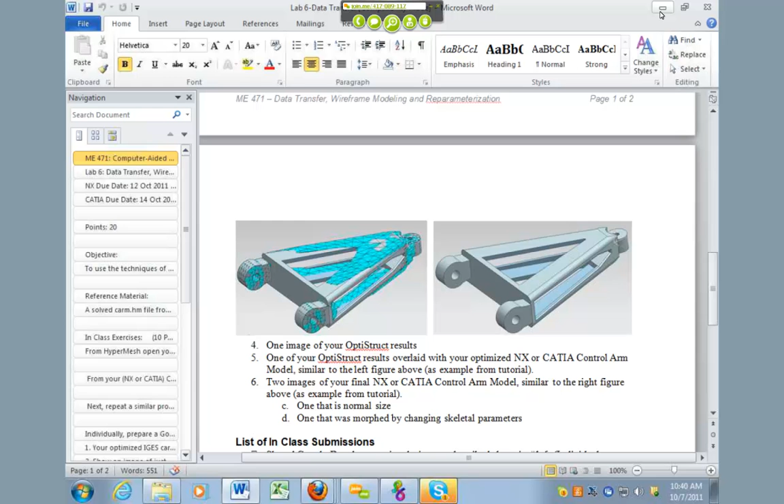So that's all we expect for the in-class exercise. When you guys are recreating these parts for your actual homework, you'll need to make sure that all of these sketches you create are relative to your skeleton. You'll need to make sure they're parameterized and linked up to your skeleton, so that when you hit in the IGES file, you can morph the recreated part and still have it fit.

There's a couple of images in here that I wanted to show you guys. The pictures of the... Okay, yeah. And with that, it's more important to spend more time on your part and not the tutorial part. Don't spend tons and tons of time making the tutorial part look really good. I can't make one, but don't worry about it too much.

I got a question. For this homework, do we all have to do the control arm individually? Yes. Because that just seems like a waste of time to me, since some people are doing one they're actually going to use, but we're not doing a part we're actually use for the final project. Yes, that makes sense, but the purpose of this lab is to still not just do the tutorial, but to do one. And then you could use one of those in the project, and still do another. Just because the people doing suspension are already doing this. I said it does make sense, but however it is this assignment.

Yeah, so let's do it. This will be your first screenshot. You'll have the IGES component with the part. That'll be your in-class assignment.

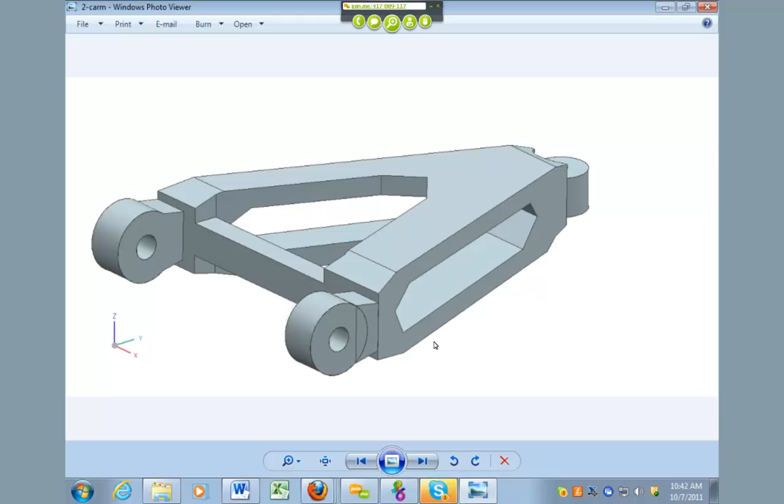So you'll have an IGES with the car part, then a screenshot of just the optimized part without the IGES. Then you're going to take an actual part from your car, something that's already in there, and you will run an OptiStruct analysis.

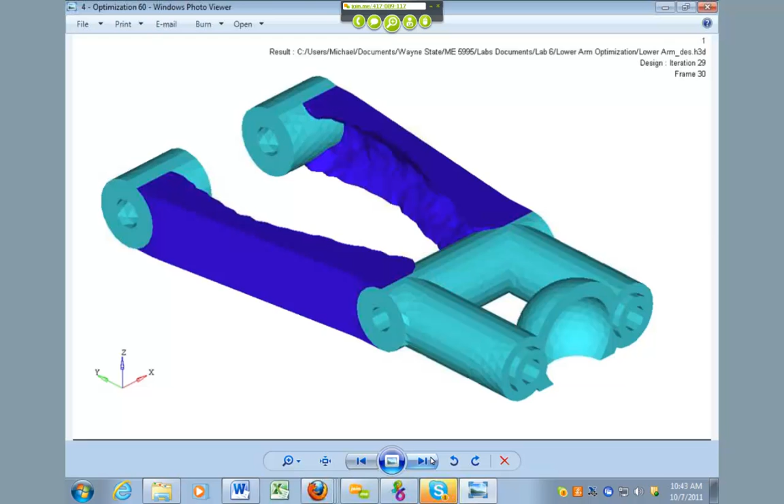First, you'll show that it's parametric, so you'll show that you can move it. You'll come into OptiStruct and run an analysis, and you'll have a screenshot of the eaten away geometry. You'll then bring that back into Catia, recreate the part, and show the part with the IGES geometry in it. Then you'll have just the regular part without the IGES, and show that the new part can be parametrically changed.

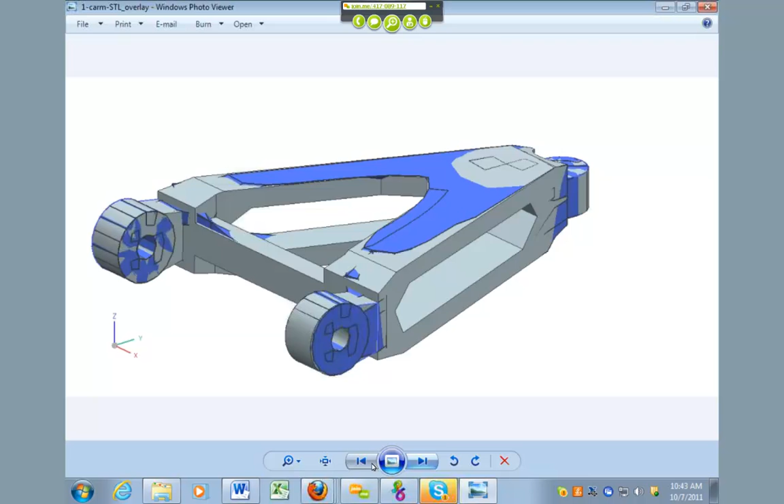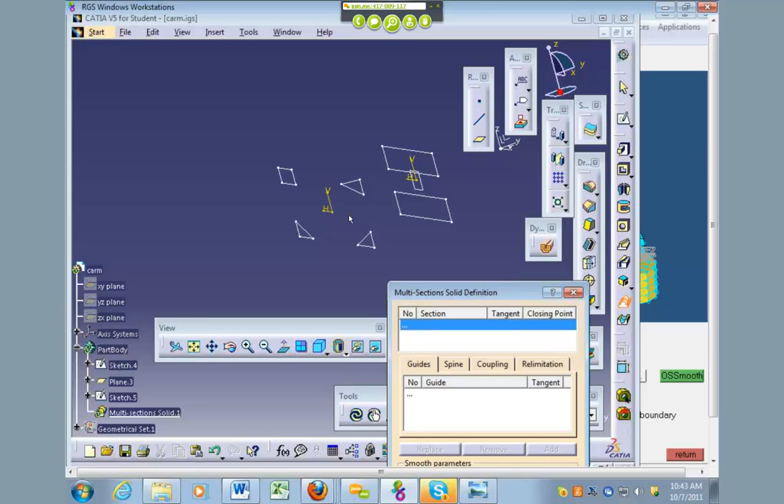So that's kind of what we expect. When you're inside Catia and you've got this thing imported and you've drawn all your geometry, you'll need to make sure that new geometry is constrained to your skeleton or using the parameters from your skeleton, so it'll update properly.

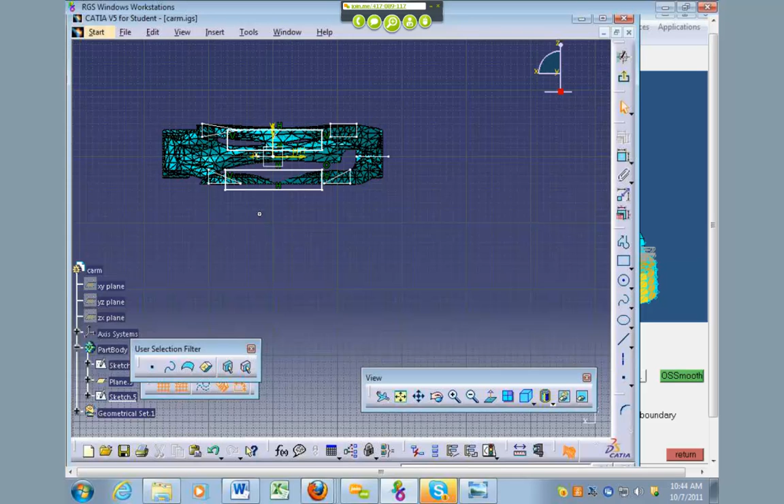There's a whole bunch of different ways you guys can do this part. One way is to just take multiple cross sections by creating new planes, and at each one of those planes just use that clip tool I showed you guys. So if we come into this sketch right here and clip it, you can see exactly what's on that plane, and you can make a nice square or triangle or some nice rounded edges.

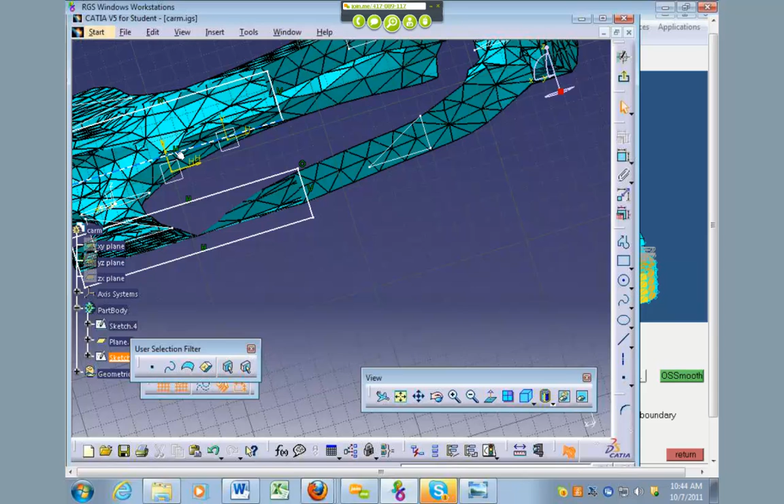You don't have to actually go from point to point to point to point. That's just something that's not manufacturable. So we want a manufactured part, so this has got to be something nice.

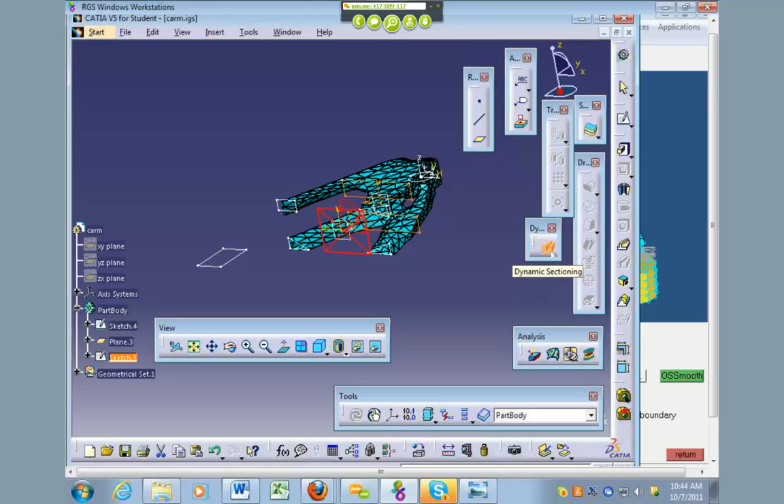And then you can turn on your dynamic sectioning tool if you need to, and you can clip things at different planes as well, so you can clip things at that plane if you need to get a better look and see how well that fits there. This dynamic sectioning tool works outside of the sketcher. On the inside of the sketcher, you just do clip plane, and it'll clip it wherever you need to.

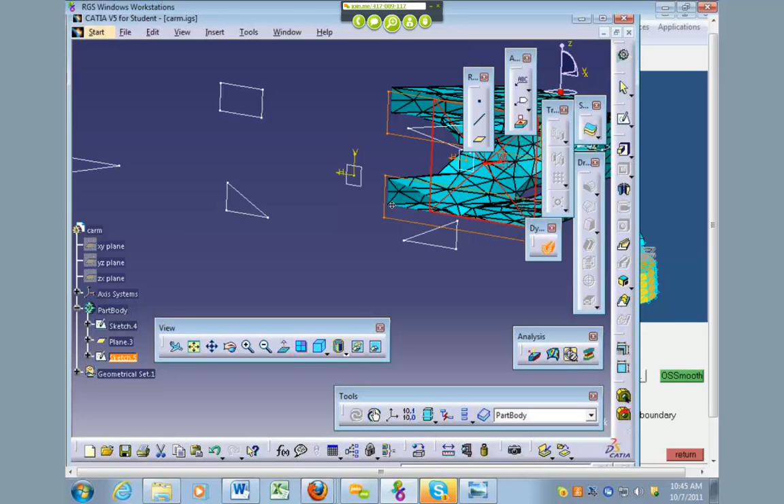So you guys can use all of those tools to get a good idea of what the cross section looks like. My suggestion is to have multiple cross sections at different points where the geometry changes. Right here it's all solid, just one solid body, but if you come out here it breaks off into 2 legs. So you might want to have a couple cross sections there to create a multi-section solid that you can loft through, which would be very helpful.

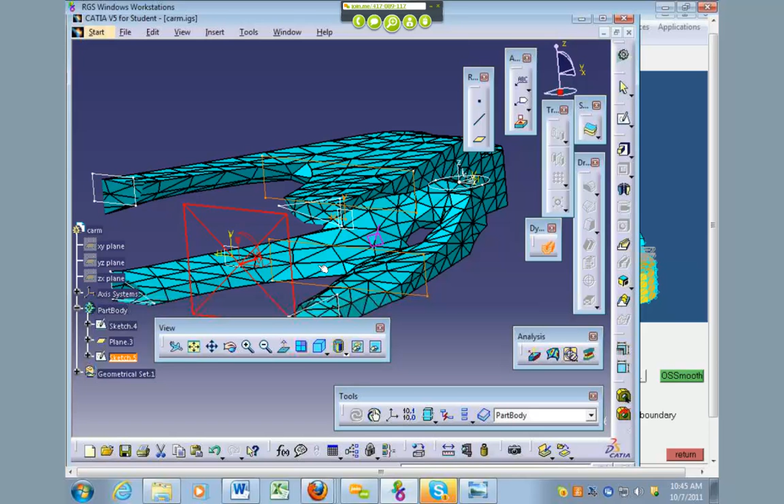Anyway, so you can recreate the part. If you're not keen on using these multi-section solids, you can just do a regular sketch. Let me grab that plane and we'll do a sketch on that.

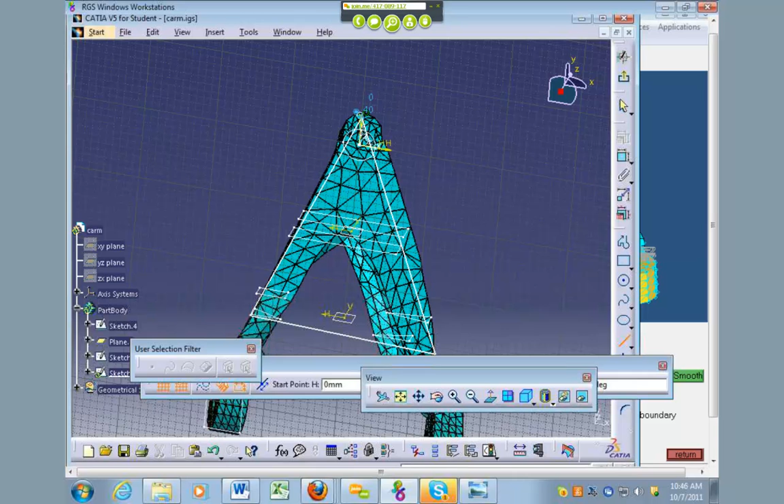You can just do something that looks like this, even if you wanted to. Come down here, come over here, place that, come up here, place that. So there's that, and then you can pad it up.

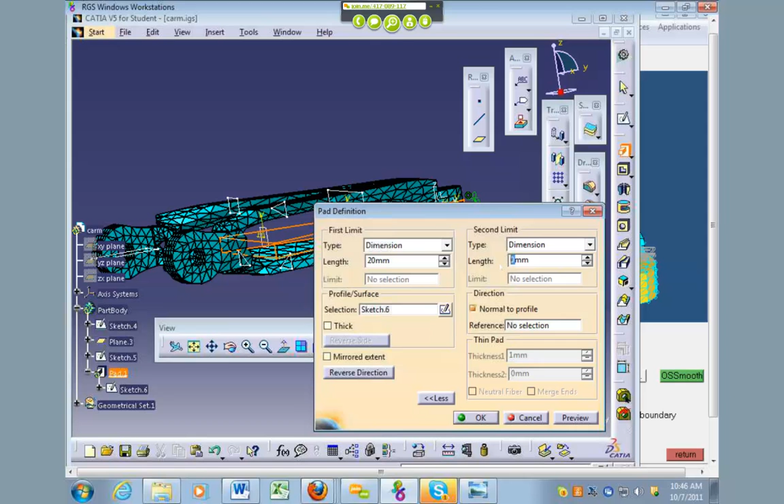Come on, pad, there you go. And you can pad it up, up to where the arrows are. Let's do like 20 and 20. So maybe more like 40. I'm not sure what the exact dimensions are on this thing. There you go, something like that, right?

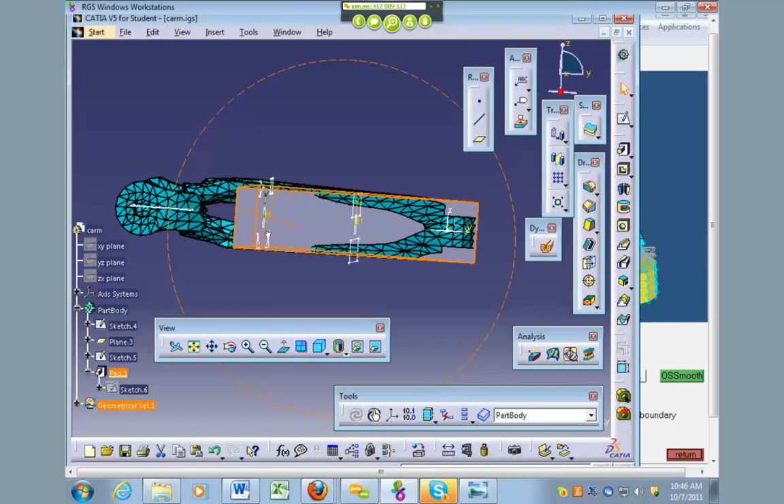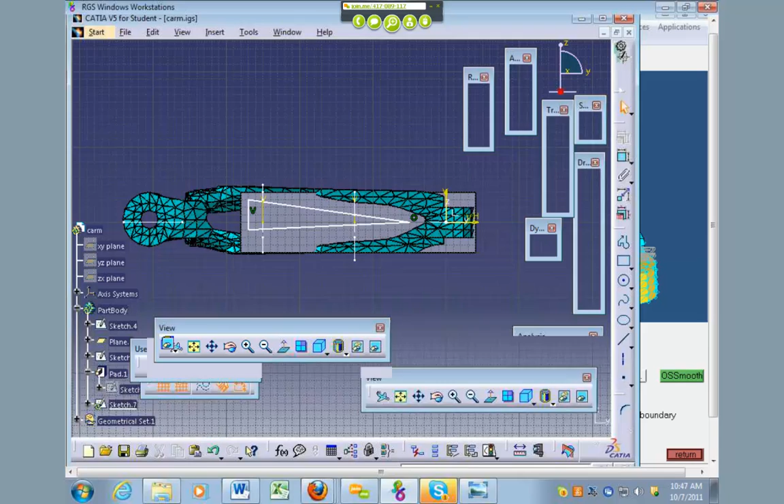So you got your geometry in there, and then you can come over here to the side and say, okay, this is kind of missing. So you could do a sketch on this plane, and draw a triangle about right here to about right there maybe, have it come down here, come back there, hop out of the sketch, and pocket it out.

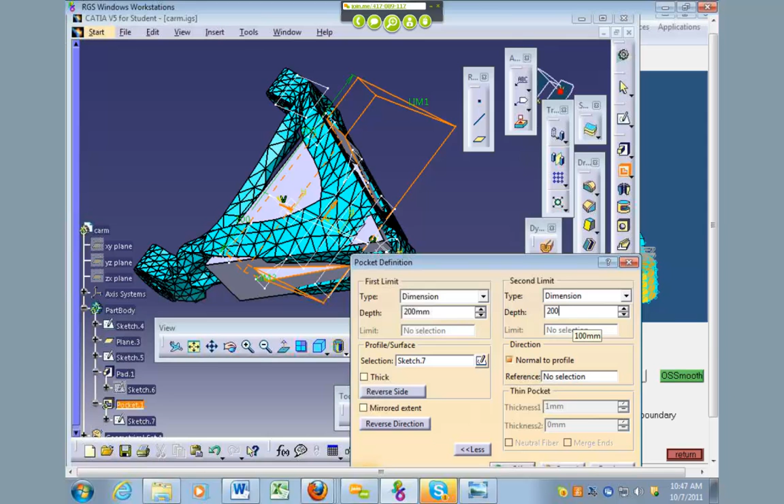I don't know, maybe a little bit more than that, maybe like 200. You'll need to make sure that this is parametric, right? Okay, so something like that.

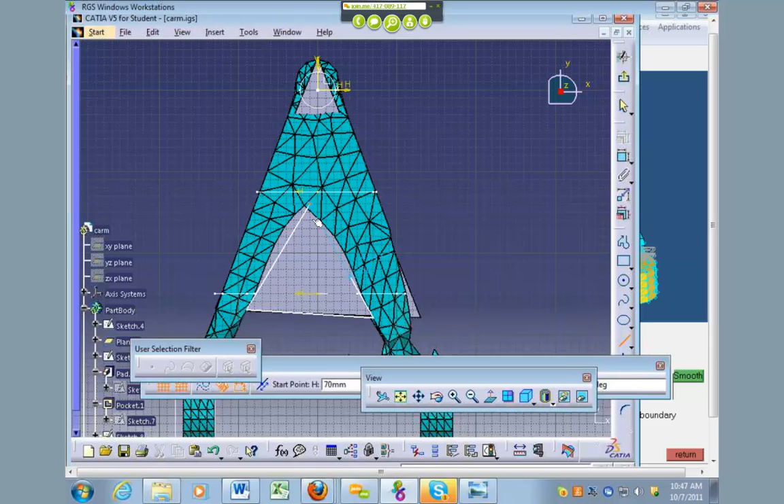You can come up here and do another sketch. You can even do it on that face if you want to, and do something like this. Right? And so, obviously this is really, really eyeballed and very poorly done.

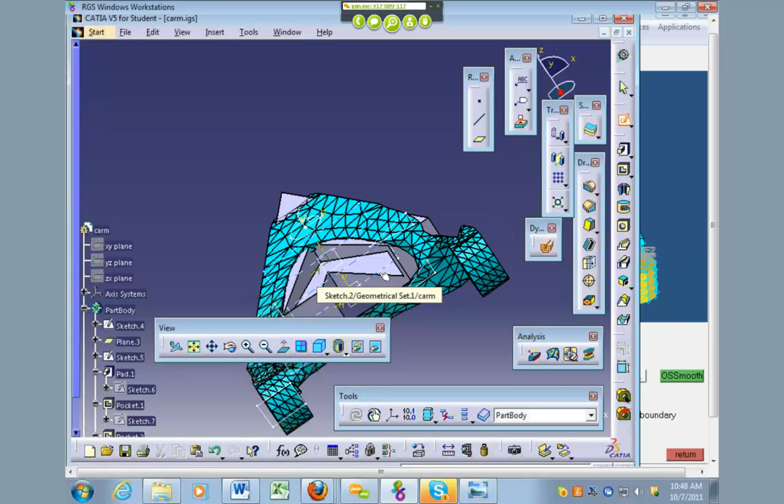You want to make sure that it's symmetric and that it looks decent, things like that, but you're basically recreating the part, but with the missing geometry that OptiStruct ate away. So you're basically eating away your part so that it's the same part you had previously, but now it's got those changes, so it's more lightweight and doesn't need that extra material.

And then when you're done, you'll take a screenshot of this, and then you can come in here and hide this, and eventually you'll have this new part. So those are some different ways you can do it. One way is you can just eyeball it, doing some regular sketching the way you normally would. The other way is you can use those sectioning tools, take cross-section cuts, and then use a multi-section solid to sweep through those different cross-sections, okay?

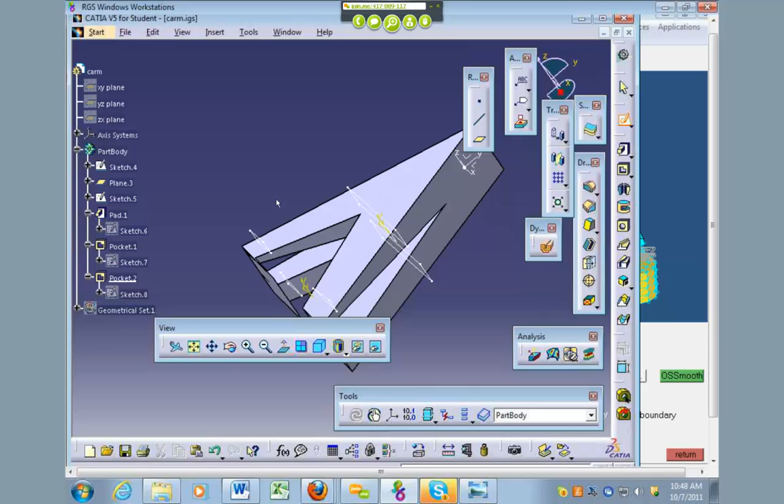So, are you guys familiar with the multi-section tool? Okay, for those of you who aren't, I'll do a real quick demonstration for you.

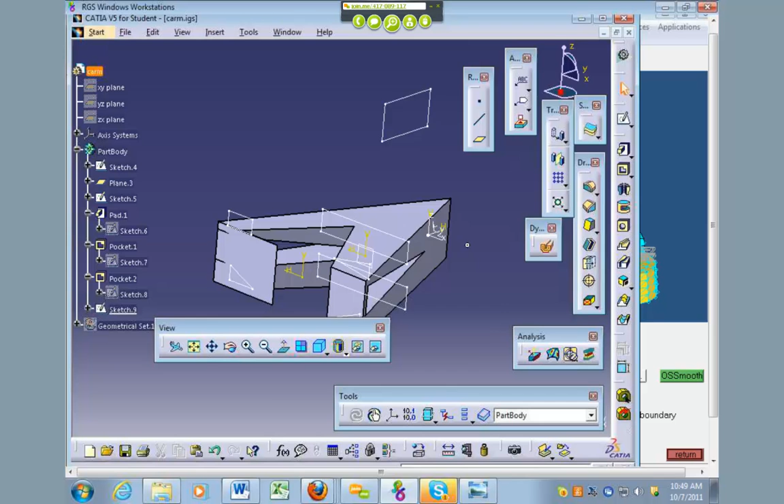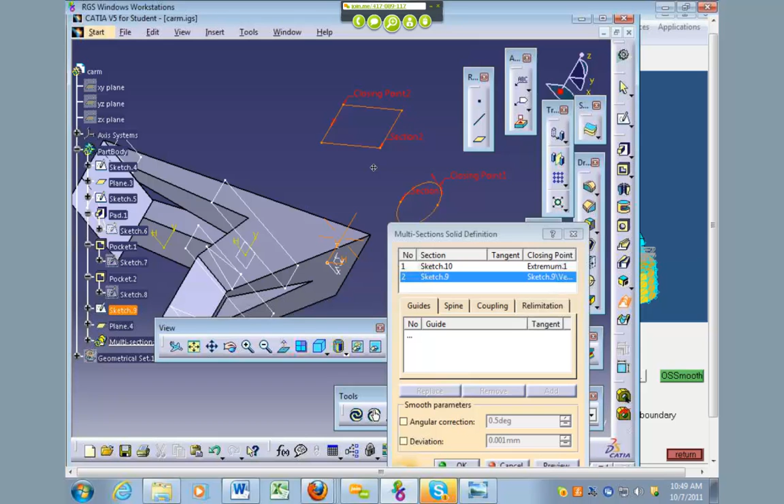So if I create a sketch on this plane, and I do a square here, and then I have another plane offset. Let's see here, grab that plane right there, create a plane. We'll do it over here, and I'll create a sketch on this new plane, and we'll do like a circle. You can use this tool right here called a multi-section solid, and you can grab different geometry, and then when you press OK, it'll create a loft.

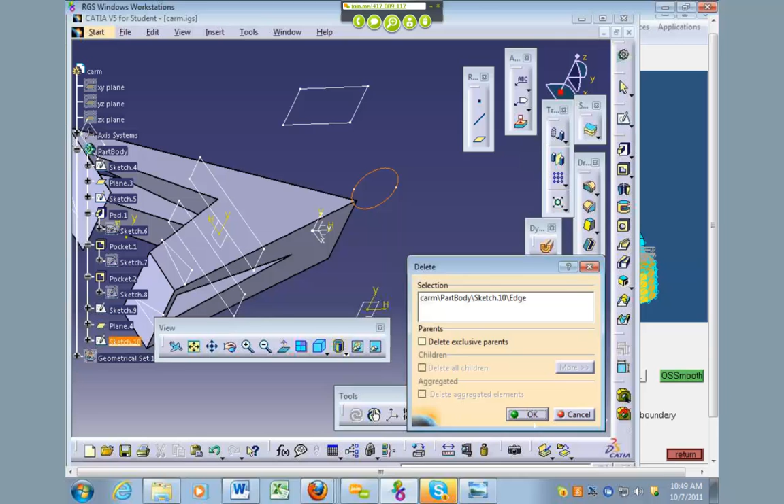Sometimes it'll throw an error like I just showed you guys, where it's showing that it's getting twisted. So what you need to do is make sure that the geometry is pretty close to what you're doing, and I'll show you a better example here. So, like, when you're doing that, can you go—yeah, you can, yep. So this is a better example here, and I'll give you guys a better indication of how to use it.